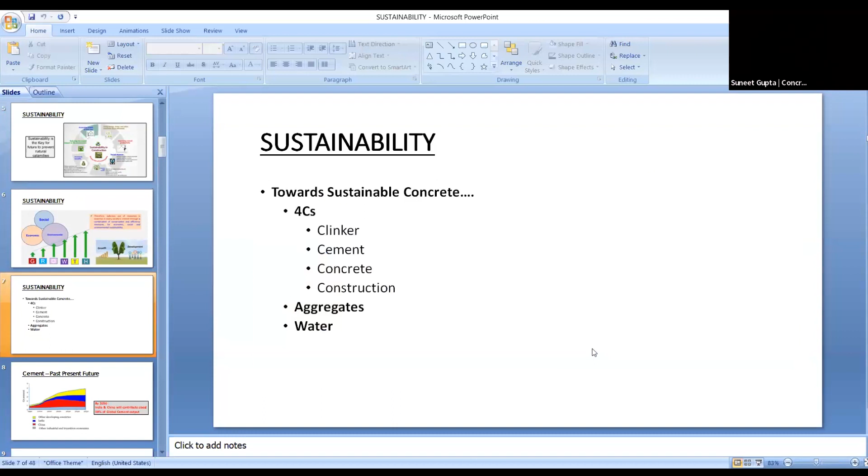So what we have to see is sustainability in our construction - the 4 C's: clinker. Clinker is used in cement manufacturing, cement is used in concrete manufacturing, and concrete is used in construction. These are all 4C related: aggregate - fine sand and coarse sand - and water. This sustainability is all interlinked in construction through these factors.

We can see that limestone reserves are only sufficient for the next 35 to 40 years as per the project, whereas cement requirement is going to more than double by 2050 at the present pace. So we have to be very careful in the usage of raw materials, the natural resources we have, in all stages of our construction practices.

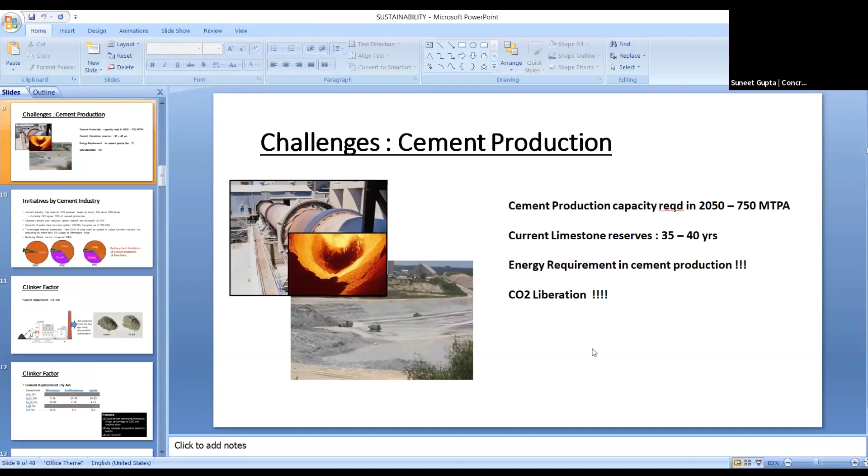Carbon dioxide, as I told you, has gone down to 665 kg per ton from 900-950 plus. Share of cement with reduced clinker has gone to more than 75%. Waste heat recovery systems in cement manufacturing has gone up to 550 megawatts. And for reducing the clinker factor - by using supplementary cementitious materials like fly ash and slag, which are generally considered waste in thermal power stations and the steel industry from where we get slag - these have been consumed and reused in cement manufacturing, turned into useful products. Hence we have reduced clinker from 90-95% to 70-75% level.

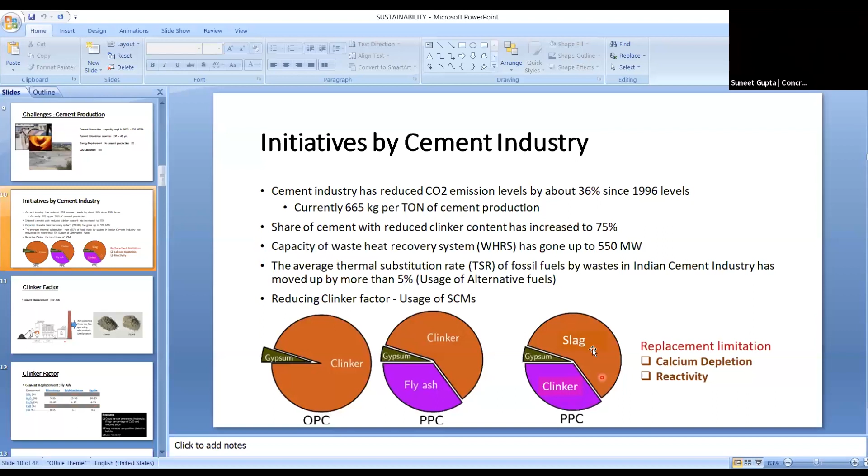Depending on whether it's PPC, pozzolanic fly ash based cements, it can go up to 50% in slag cements. We get fly ash from the thermal power industry, and the quality of fly ash depends on the quality of coal we burn - bituminous, subbituminous, or lignite. As we can see, subbituminous coal, in the middle column, gives us the best kind of fly ash, where we need SiO2 - reactive silica - and calcium oxide.

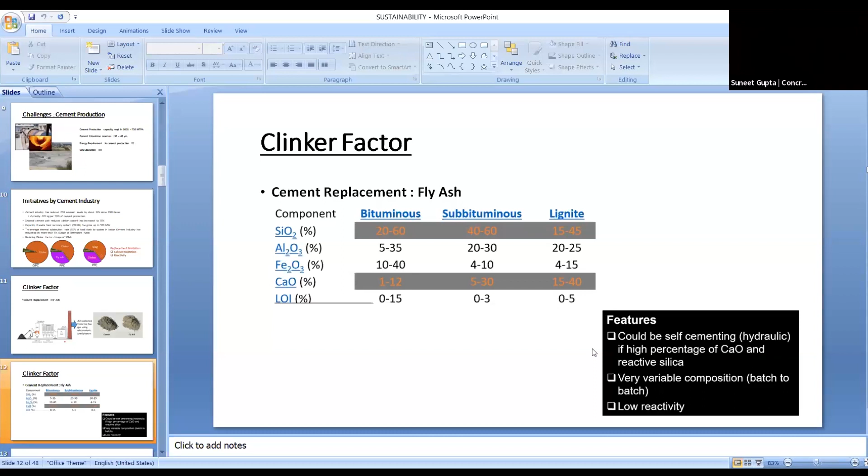So these two factors are best in subbituminous coal. We try to use this coal as far as possible, but where we cannot, we use other coal and try to redefine our manufacturing or quality process through fly ash while keeping cement quality the same. This is the kind of fly ash we use - you can see how small the particles are, in this SEM image magnified up to 2000 times.

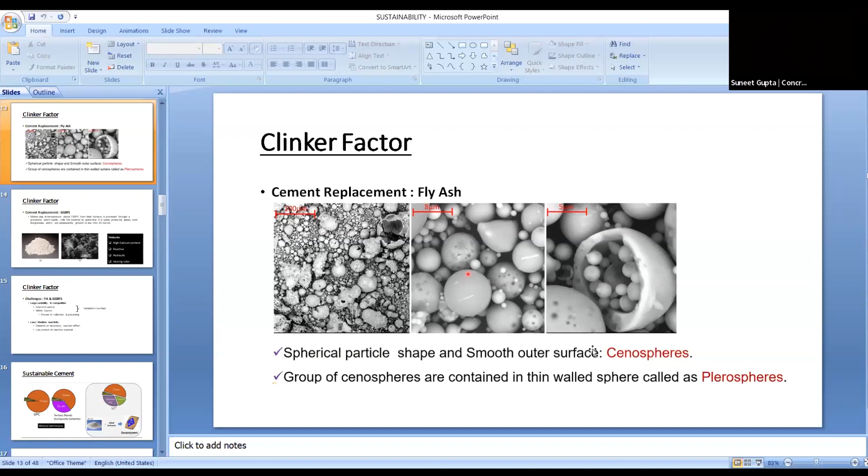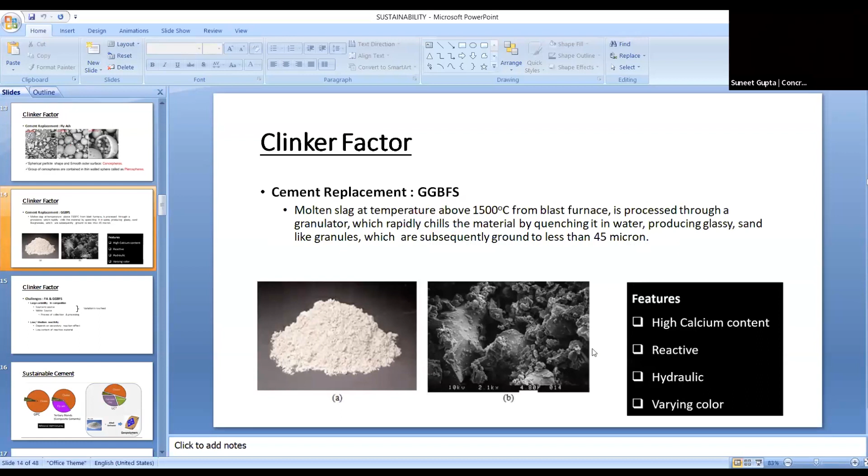Similarly, GGBS - ground granulated blast furnace slag - which we get from the steel industry, also has high calcium oxide levels, and that's why the replacement level of clinker is higher in slag than in fly ash. So wherever slag is used, we can replace the clinker, and hence the usage of limestone can be reduced by up to 50%.

Challenges with fly ash and GGBS are that the variability is from source to source, or even within the source, because of the way we process and collect the fly ash or the slag. There is a large variation, and this variability is because of the variation in the raw material being used in making this fly ash or slag.

The second factor is reactivity. The reactivity factor, as I told you in the previous slide, the reactive silica we have is the most important factor in making the cement, and hence the concrete, more sustainable and more durable. So these kinds of variabilities are due to the variability of the raw material consumed in making these.

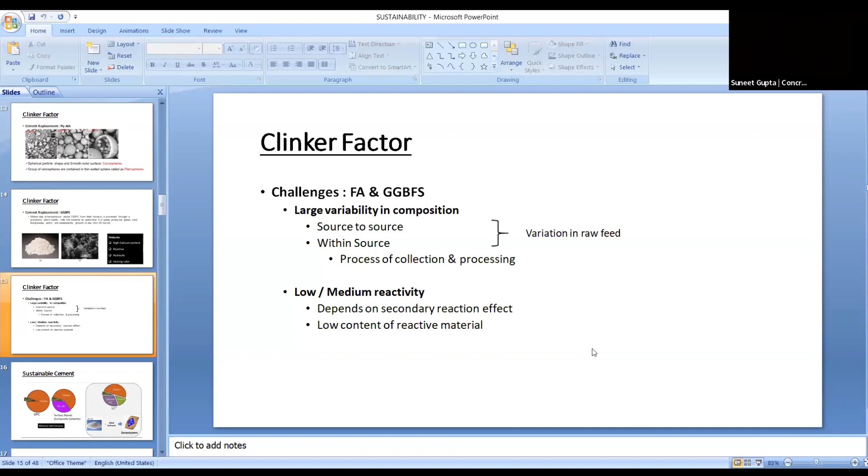Further to the blended cement, what we call Portland pozzolana cement, where we use fly ash, and Portland slag cement, where you use slag up to 50-60% in cement, further research is going on with LC3 cement. LC3 is limestone calcined clay cement.

So from 50% in slag cement, 75% in fly ash PPC cement, this clinker factor can be further reduced to 35 to 40% level with LC3. Research is still going on. Few countries have started accepting and producing this LC3 cement, but in India, things are still going on through IIT Madras and IIT Delhi.

And second is this geopolymer cement, where even the clinker can be completely taken out. This geopolymer cement is still in an advanced stage; I think it has already been used in a few places. So these kinds of research are going on to make a sustainable cement and hence a sustainable concrete.

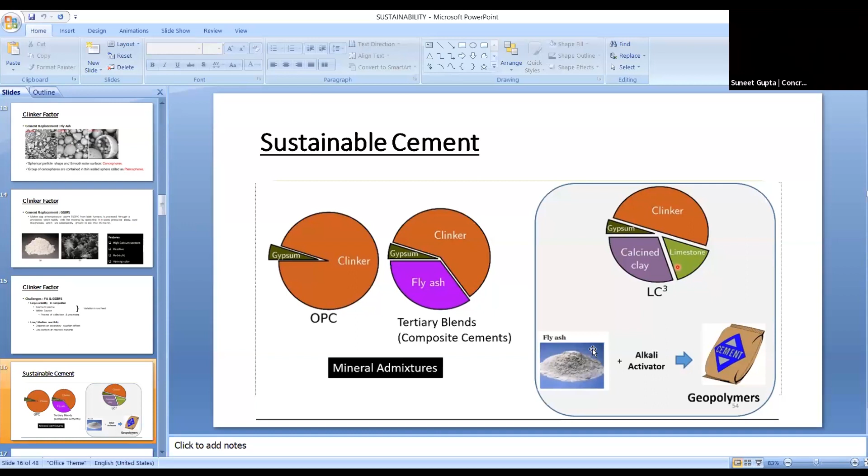When we talk about concrete, the consumption is around 2 tons produced for every human being. It has been told that it is the second most consumed material on Mother Earth after water. And every year, the concrete produced is equal to a volume of 1 kilometer by 1 kilometer into the height of Everest. Where does it all go?

And how much raw material do we consume in producing cement and aggregates? We are consuming mines, and then water. Some countries are without water, like in Africa, and it's said that the next world war could be fought over water. So these things are being consumed so much, and without them we cannot live.

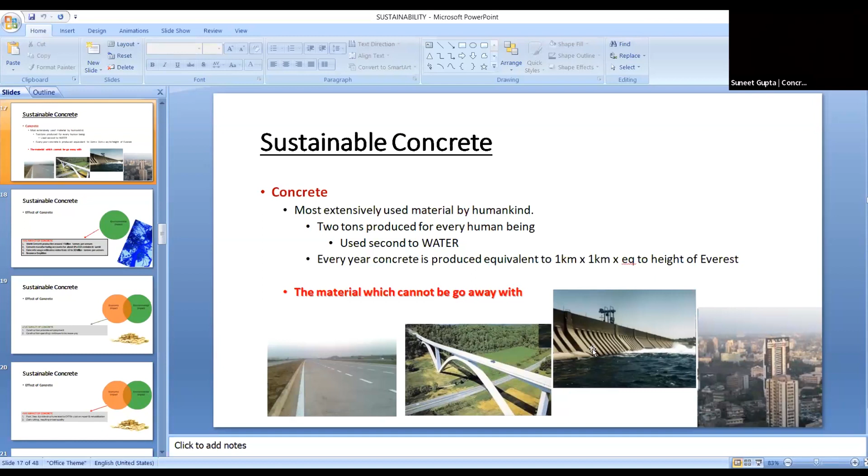Without concrete, we cannot think of any suitable product at the moment which can replace it. So we have to be sustainable in our thinking from day one. That is my main criteria for this.

So the effect of concrete on sustainability, as we see the 3 pillars: on environmental impact, I don't see any positive impact of concrete. The negative impact is that 4 billion tons per annum is produced, 8% of total CO2 is produced through cement manufacturing consumed by concrete, and concrete usage is estimated at around 30 billion tons per annum. So we can see resource depletion going on from day one.

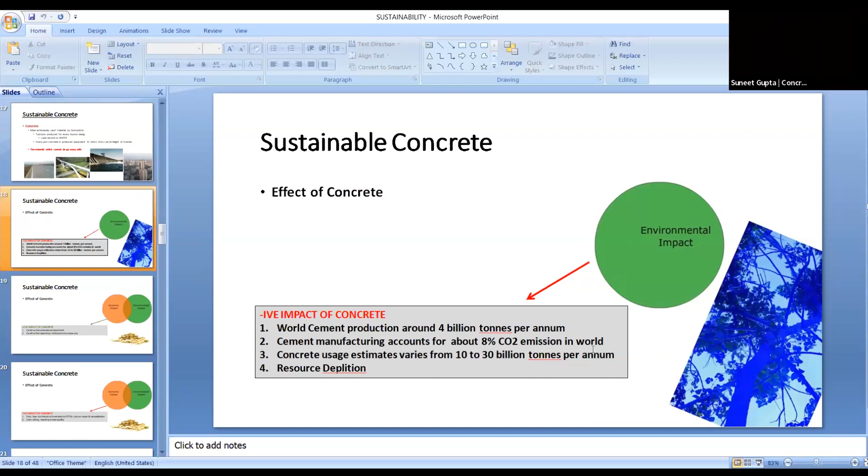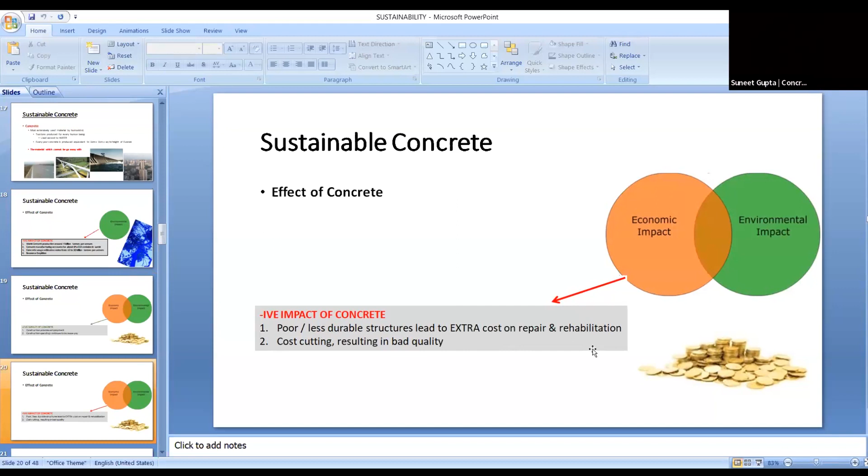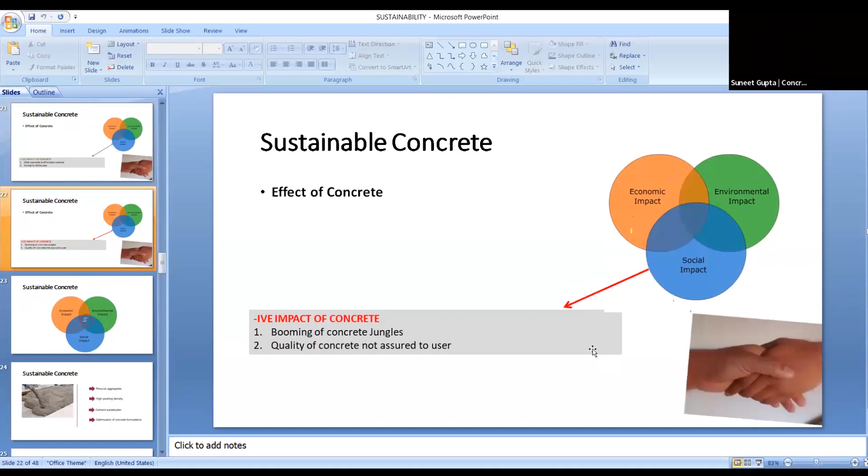When we talk about economic impact, construction provides employment which increases year on year, but the negative impact is less durable and cost-cutting results leading to bad quality concrete. When we talk about social impact, it's the most versatile and affordable material, strong for all usage, but the negative is the booming concrete jungles, and quality of concrete is not assured. So that's how sustainability looks.

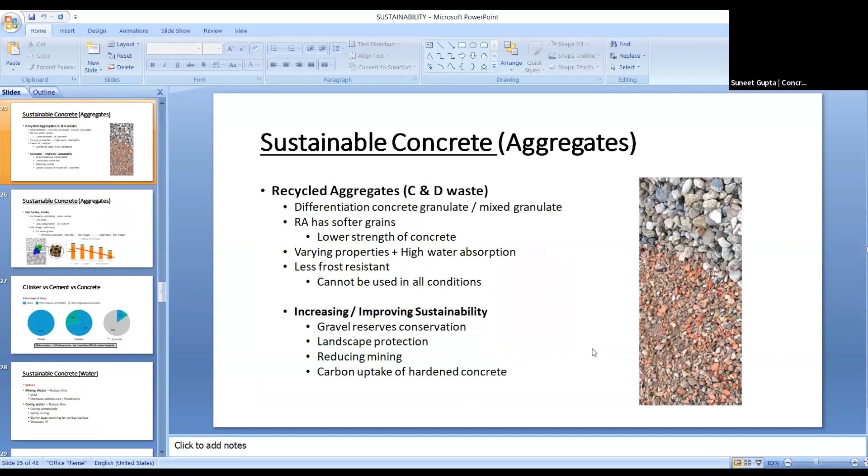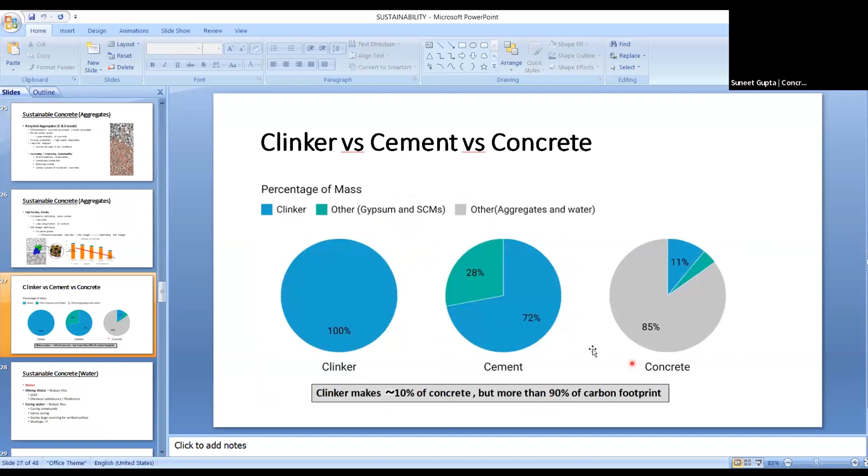The next thing is recycled aggregates. We should stress on recycled aggregates, but they have their own advantages and disadvantages; as far as possible we should use them. We should go with high packing density of aggregates so that cement consumption reduces. If you see, clinker in concrete is hardly 10%, but the carbon footprint is more than 90%.

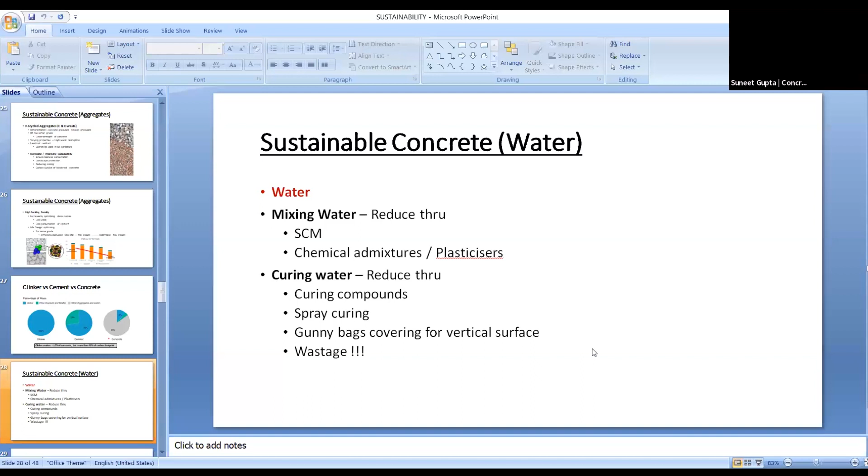When we talk about water, we can reduce mixing water and curing water. There are effective mechanisms, as I have listed, and more beyond that, but we should reduce water also. There is something called carbon curing also, which we can further explore.

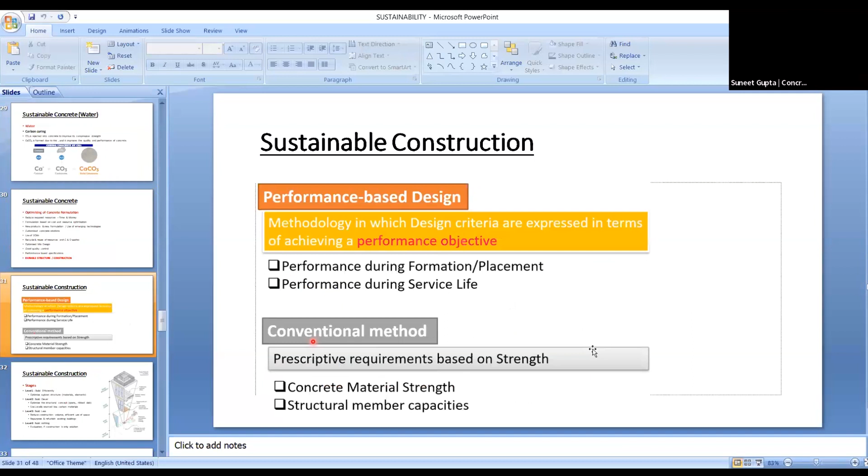Finally, in construction, earlier we used to go only with the strength of the concrete, but now performance-based design has started—how long the concrete will last, the design is done accordingly. Sustainability is what we should pursue with less 3C: clinker, cement, and concrete.

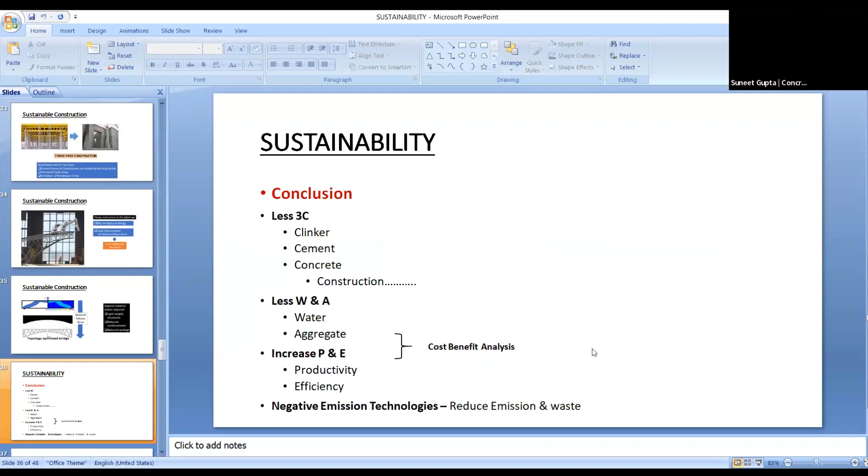And hence these 3 can be introduced in our construction: less concrete, obviously through high strength concretes and sustainable materials, which can reduce concrete levels; less water and aggregates, increasing productivity and efficiency; and we can introduce negative emission technologies so that CO2 emissions are reduced.

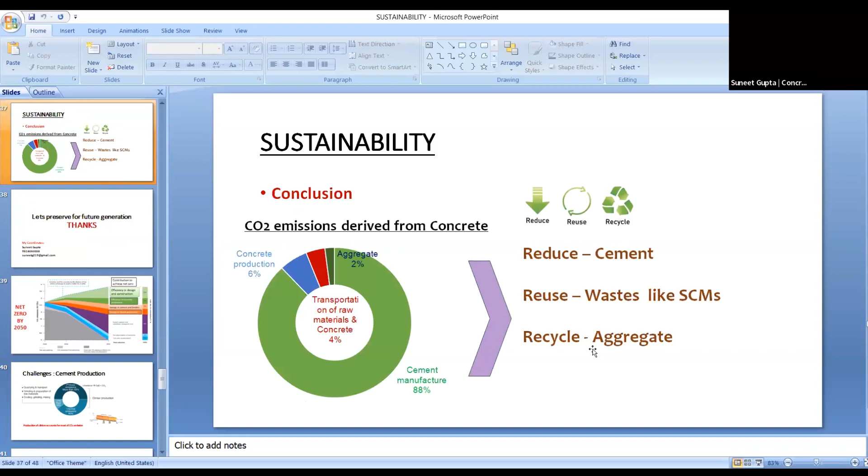Finally, reduce cement, reuse wastages like fly ash and slag, and recycle aggregates.